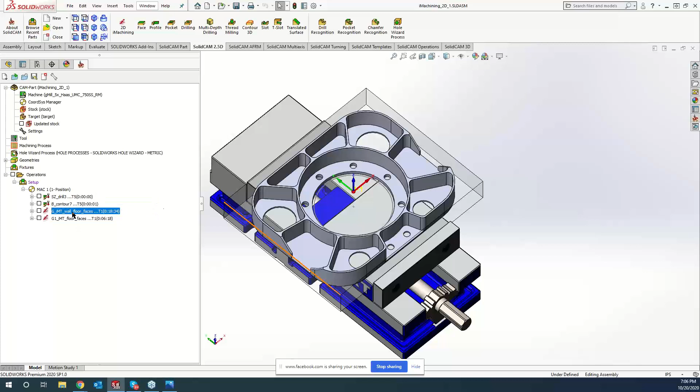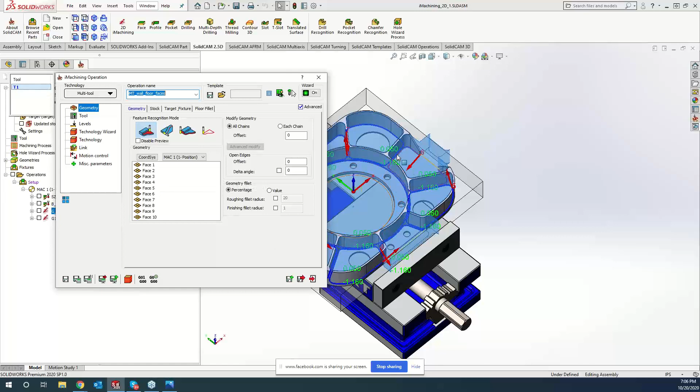Inside iMachining, and this is new for 2020, is all the different feature recognition that they have built in there. What we talked about a few weeks ago is all the feature recognition by face. So what we did here is just clicked on all the different faces, so you can see all my different faces that I selected here, as well as there's a light blue highlighted area of what iMachining is looking at to machine out in that area.

We have all the different modes in here, and today we're going to be talking about feature recognition by chain. But just to recap, this is all off of faces. All you guys have to do is click your mouse cursor in here and click on any face that you would like to machine. Doesn't matter if it's a fully open pocket, a semi-open pocket, or a pocket with an island. It will recognize all based off the updated stock that is in there, and it will only machine the rest material that is left over.

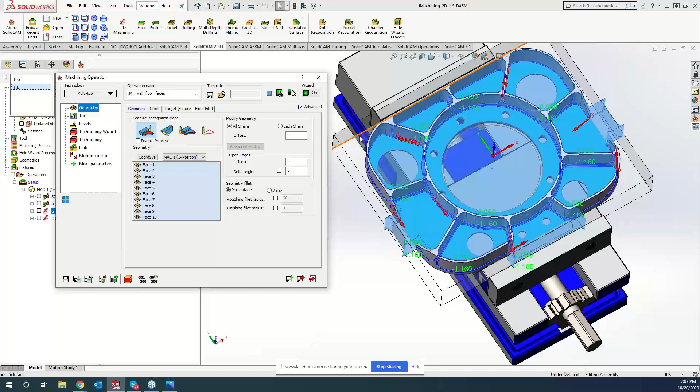As well as we did a probing on this right here. So what I'm going to do is quick run this through our machine simulation. Give it a second to load here.

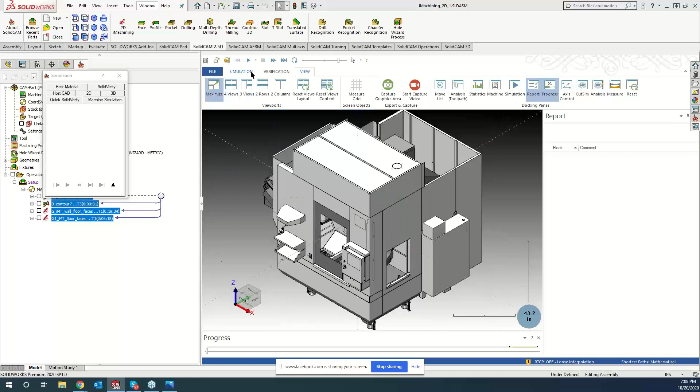All right, so I have the 3-screen preview showing right now, and once it gets fully loaded I'll switch over just to the single. Okay, so we have our single machine there, and we'll just get rid of the machine housing and zoom in here.

So the first part we're showing right here is the probing. Let's slow this down a little bit. So probing our x-axis, now we're probing our y-axis, and doing our z-hit. Now this is where it's getting into the iMachining based off of the faces here.

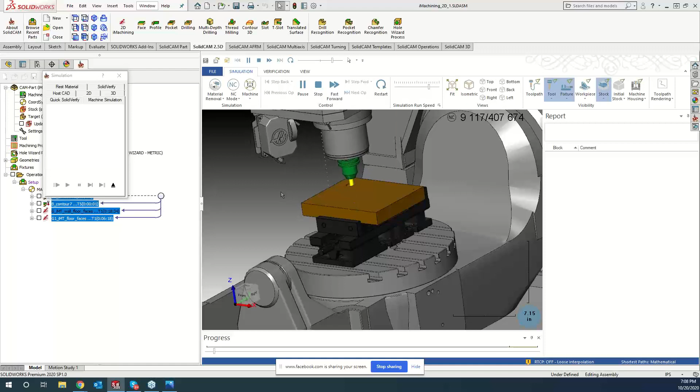So we can kind of speed this up here. I am showing machine sim right now just to give you guys a better look at maybe a different machine or what the machine sim can do for you guys. This machine is a Haas UMC 750 that we're currently running this on here.

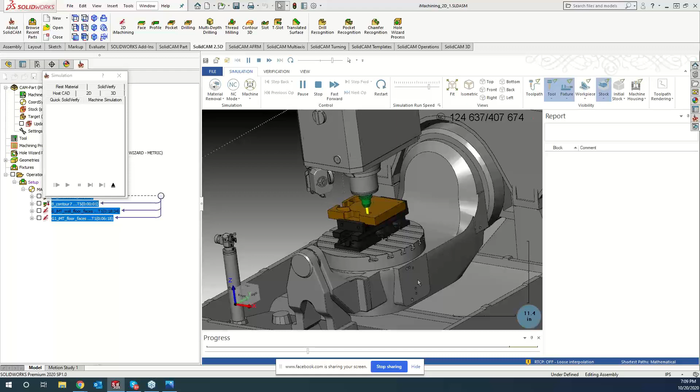Now I did learn something new about these UMC 750s, and maybe Greg knows this, but I sure didn't. On this Haas UMC 750, you have your full 5-axis right here that you can mount your vise, but you also have the option to mount a secondary vise over here on this flat side, and that's kind of where the bolt holes and the pin holes are set up for you guys. So if you're doing pre-prep work on this one and then doing the full machining on this one, you guys do have the option. Now on this one, you're not going to have the full 5-axis, it's just going to be 4-axis, but you do have that option there to run that vise, and I never knew about this.

Greg, did you know about that? Yeah, I think it's a newer feature on the machines once the UMC series got the redesign. Oh, okay, the updated one, gotcha.

You know, it's kind of weird that you guys are talking about that, because I was just talking with a customer of mine last week, and I didn't know that either, which was really cool. They were like, oh yeah, I can set up a second setup on that 4th rotation. So yeah, it's a pretty cool feature.

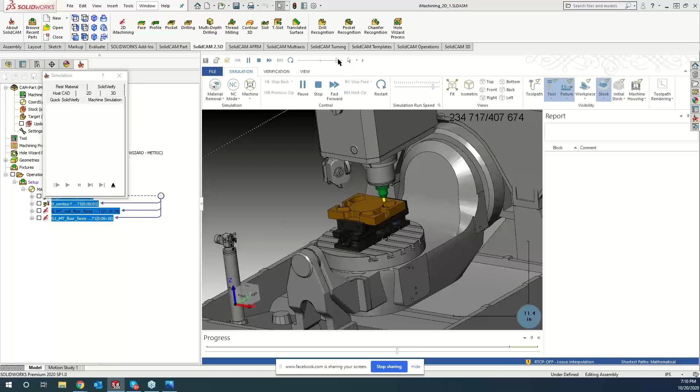Absolutely. All right, we'll speed this up a little bit here because don't want to put you guys to sleep quite yet. But you can kind of see we're basically machining out all these pocketed areas, all based off of just selecting those faces.

So now, instead of selecting a face, what we're going to be focusing on today is more or less think of it as a through pocket. We can do through slots. We can do single line geometry as well.

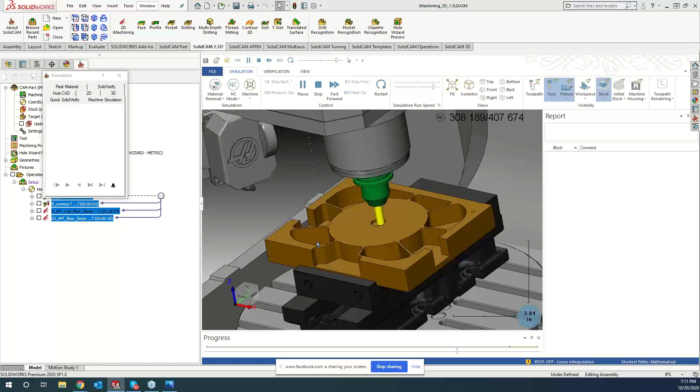So let's go ahead and move forward with the iMachining feature recognition based off of chains. Now what I'd like to do is, you can see when I clicked my faces, I was able to grab all these different faces to get these machined off. But I have these through pockets right here in the center, as well as these 4 outer holes that I would like to machine off, and they've set it up with the new iMachining to be able to do those features.

So from right here, we can just go ahead and click on our 2D iMachine. Okay, so by default, it is set up to do by faces.

Now, if this is something that you guys more or less do, maybe feature recognition by chains... The truth is out there. What's that? The truth is out there. Somebody's ringtone just went off and it sounded... Oh, it's mine. Sorry.

So you guys do have the option in your settings to set up the default. When you open up a new 2D iMachining operation, you can have it defaulted by faces, defaulted by chains, do outside feature recognition, or no feature recognition at all. So you do have that option, and I should probably show that to you, since a lot of you are using this iMachining quite a bit.

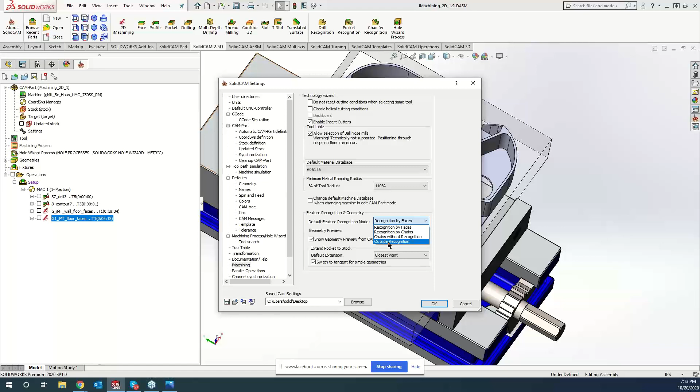So if you open up your global SolidCAM settings and go down to iMachining, right here is your default. Right now I have it set to default recognition by faces, which is probably on all of your systems currently, because that's the default install. But if you'd like to do recognition by chains, or without any recognition, or outside recognition, you do have that option right there. So anytime you start a new iMachining operation, it will be customized more to what you'd like instead of what our software is currently loaded with.

Okay, so we want to do those through pockets. So I'm going to grab new geometry, and I'm going to grab all these circles in here, or these through pockets.

Now, like I said, all of this feature recognition is based off of updated stock. So if we didn't have this face milling, or this recognition by face, already pre-milled out, it would know that there's remaining stock up here, and it would need to start from the top and work its way down. But since it's all based off of that stock recognition, it knows we already machined down to this face, so all we really have left over is this little area right here. As well, it doesn't matter with iMachining, you can pick different levels all the way through—it's all based off of the stock, so we're not going to machine any air at any point in time.

So now what I'm doing here... sorry, my text message. There we go. So for this first one, I'm going to pick a very large end mill. We've got a 1.25 inch end mill going in there, so we'll go ahead and accept that.

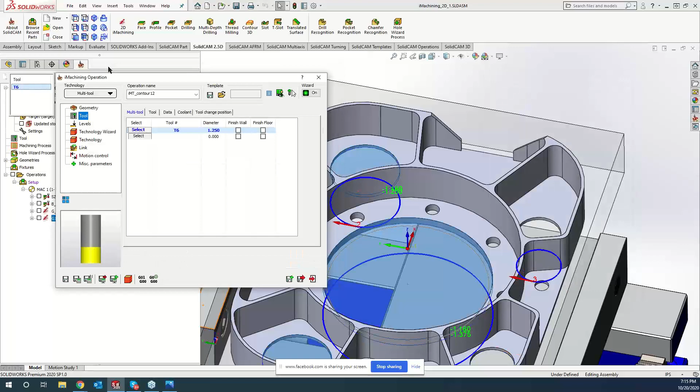Now you'll see that it's doing the updated stock, so basically anything that is blue is going to be machined by that tool. But obviously I have 2 holes left over here that I'd like to machine out as well. Previously with iMachining, what you'd have to do is a save and copy, then change it over to a smaller tool, and it would find it. Well, now we can do all that within one operation.

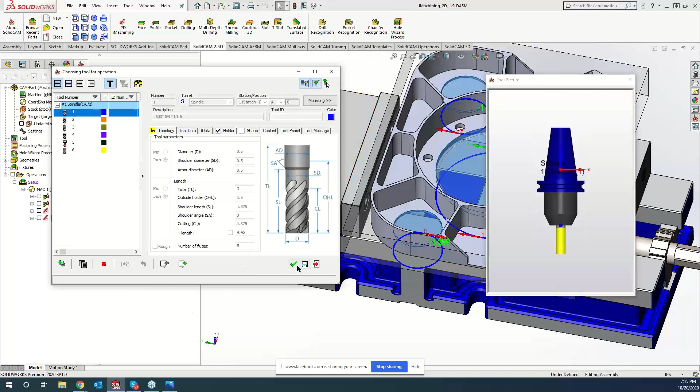So for our 1.25 inch, I'm going to tell it that I'd like to finish the wall. Then I want to come and add a secondary tool, and we'll grab our half-inch end mill, and as well I'd like for it to finish the wall.

Now our levels are all based off of the updated stock, so it's going to default to the variable levels. If you want to go more in depth, maybe put a delta in there, we can click on variable levels, and it's telling me my chain 1, which is this one right here, is going to go down 1.375 in depth. But we want to go just a little bit farther past, so we can do maybe a negative 20 thou past. As well, on chain 2, we can do a minus 20 thou.

Okay, so now I've told it that it's going to find those levels automatically for us. But if I want to go that little bit farther past, we don't get that sharp line or that little flappy piece, that little flange down here at the bottom. That's the way to go about it.

Now Technology Wizard is the same as what you guys have been used to seeing before, it's all based off of the iMachining Wizard, and it's based off of our tool that we're using as well as the material. If we'd like to go a little bit faster or a little bit slower, we can move this up or down. Now since I'm using two different tools, you'll see that I have a dialog pop up over here.

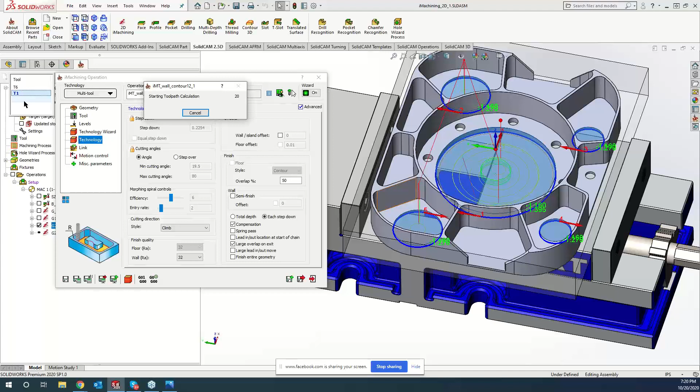So Kevin, as this is calculating, is it worth maybe spending just 30 seconds on talking about tool holding, work holding, things like that? Because it makes a big difference when you're talking about surface finish, that's hugely important. Absolutely, yeah, that's a great point.

So if you guys are planning on running iMachining in an ER holder, ER32, ER16, let's just say that's the worst case scenario. Best case scenario is if you guys are running a tool holder and a heat shrink holder, as well as here at SolidCAM we use what's called the Rego-Fix holders that are done by hydraulic pressure that work absolutely phenomenal. Both myself, Brendan, Greg have all watched those in action, and it just blows our mind on how well those tool holders work. But it is also with the tooling as well, so the old saying, you get what you pay for.

If you guys try to go out and get that cheap tool, you may not get as good of a surface finish, as well as a good tool life, than if you go out and spend a little bit more money and get a nicer tool, as well as a tool holder. For those guys that are just trying to scrape by, you can run those ER holders, but I'd recommend dialing your machining level down to about a 3 or 4, just because with those ER collets you will get some run out and some flex.

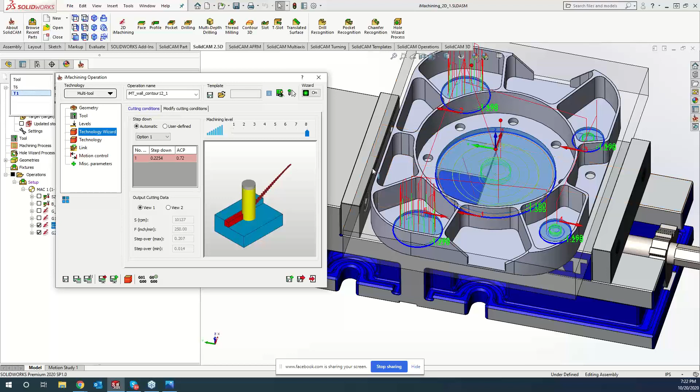If we're trying to run this on a vacuum table, we're going to want to dial this back a little bit, versus if we're running this on our Kurt vise here, we're going to get good work holding, and you can see that I'm clamping onto a good meat of this part right here.

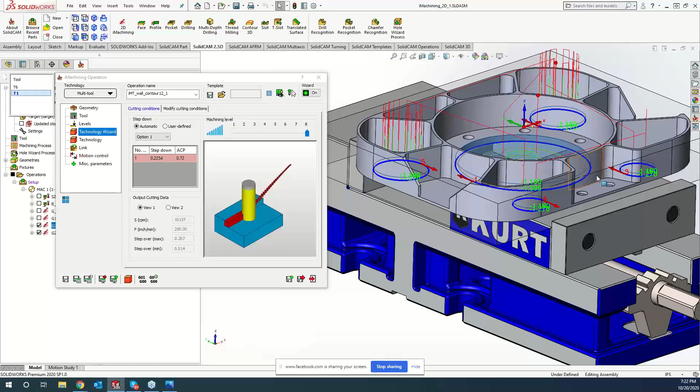So that's a great point, Brendan. Basically, to sum it up, the more you spend on your tooling and tool holders, the faster you'll be able to push iMachining, as well as get that production out the door for everyone.

And just to add to that super quick, Evan, this is what makes iMachining what it is. It's because when you have those great conditions - the tool holder, the tool itself, the fixturing, all of that stuff - that's when you really get that focused material removal that iMachining can really do.

Every time I look at that little icon, or that graphic of the window where the tool is, I'm sure so many people look at that and go, well, I can push that a lot faster, can I? Well, yeah, you sure can if you have the right conditions. So that's something you really need to take into consideration.

That's definitely a great point. So one thing I did not cover a few weeks ago is the basic fundamentals of iMachining. We have a machining level 1 through 8 here.

And this is basically how aggressive you want to be in the cut. I like to tell people this is the pucker factor - how much do you want to pucker up that first time.

But let's say that, all right, I'm running level 8, but I know my machine and my tooling can go faster. Well, that's what we have the modified cutting conditions for. So we don't lock you guys out of anything at any point in time.

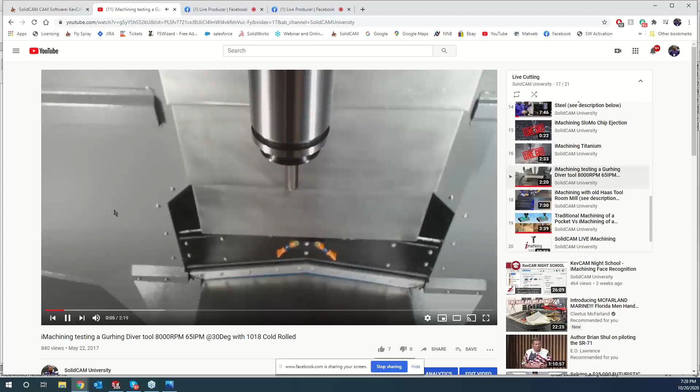This is nuts. We're basically trying to break the end mill, and it didn't happen, but I went a little too far here. I remember this one, Kevin, because we kept telling Ken, just go faster, go faster. Yep, let's add more angle. So this is 1018 cold rolled right here using a Gurhing Diver, and look at that. That's crazy, with a 30-degree helix.

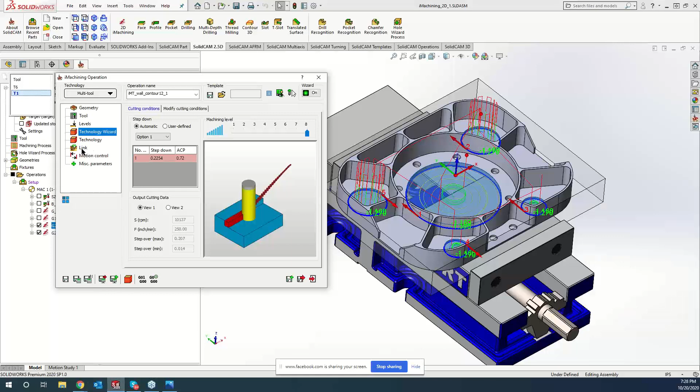We started off, so by default, I'll pause right here. By default, our linking in the link section is 1.5 degrees, which is really safe and conservative. But Gurhing sent us these tools and said try it out, let's see what can happen. So we started playing with 5 degrees, then 8, then 10, and I think Brendan finally said, Ken, let's just crank it up to 30 and see what it can do. Between the built-in algorithm and the tooling, this was done with a REGO-FIX tool holder. We knew our tooling was very good, so we cranked it up and hoped for the best.

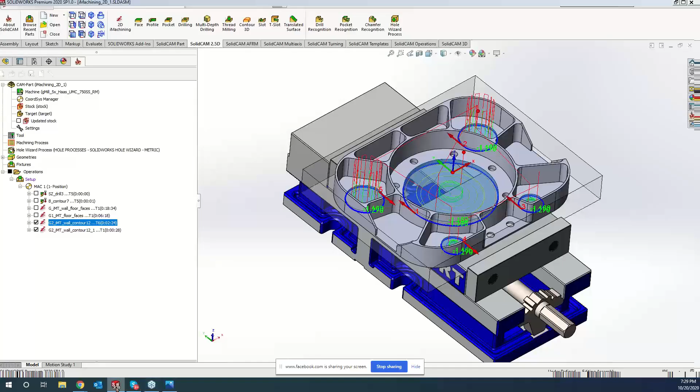So definitely the sky's the limit when it comes to iMachining. It doesn't matter if you're doing a one-off part or running massive production, iMachining will be there to back you up either way. Awesome, thanks for showing that, Kevin. I appreciate it, didn't mean to derail you there. It gives me goosebumps every time I look at it. I love it.

So we have our through pockets all selected here, let's take a peek and see what we're doing. I know there was a lot of talking, more explanation than anything, with the through pocket, but it's as simple as grabbing that chain, picking your tool, deciding how aggressive you want to be in that cut, then save and calculate.

Now, one thing that comes up on the support side is, if I make a change to the iMachining operation up here, why am I getting the asterisk to recalculate again? That's solely based on the updated stock. So if I make a modification, and we'll do one so you guys can see how it works, to a previous iMachining operation that affects my updated stock, then the operations following that will need to be updated as well.

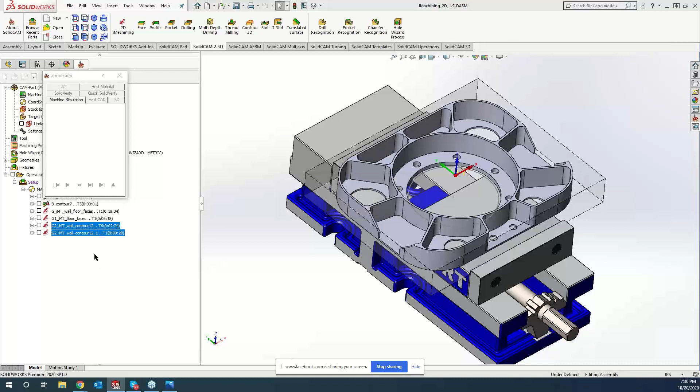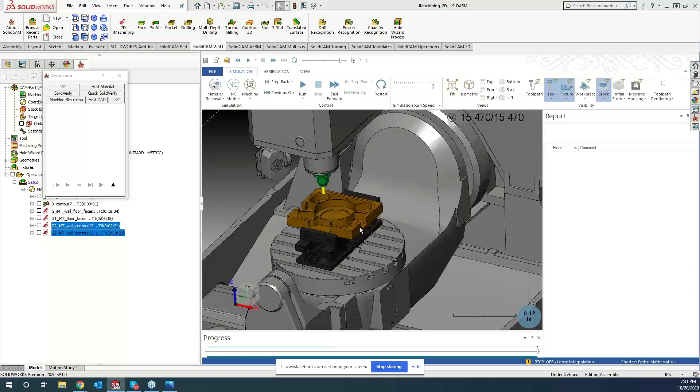All right, so now we'll get zoomed in for everyone. So you can see we're doing that helical entry. I did have more than 20 thou stock on there, so you can see we haven't broke through yet, but at least when we go to the second op side to fly cut off that backside, we'll have that taken out of there. So very simple, very easy to use.

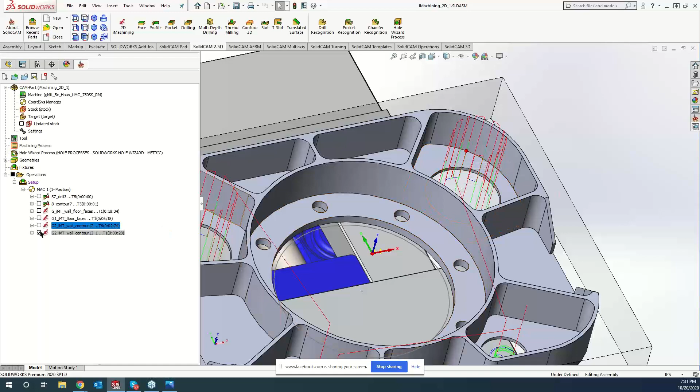Now, how about here? Like I said, what I want to do is show you guys on this particular one here. So let's say that I changed up my iMachining from the faces. I'm going to turn that checkbox off. It's that one right there. I'm going to come in here.

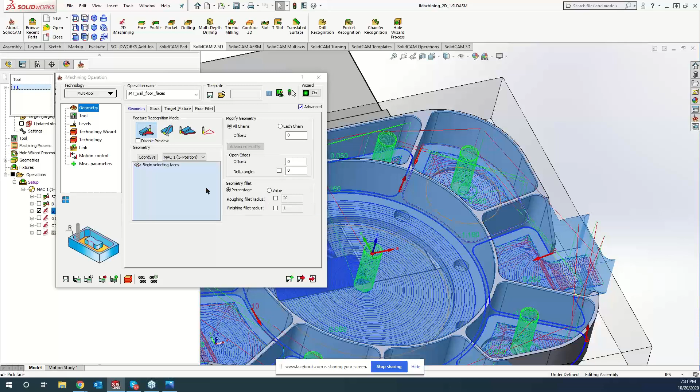And we'll go to our geometry. And I'm going to deselect that one face. Actually, hang on, I'll select everything. Just a couple of these here so we're not wasting time for you guys. And we'll do a save and calculate here.

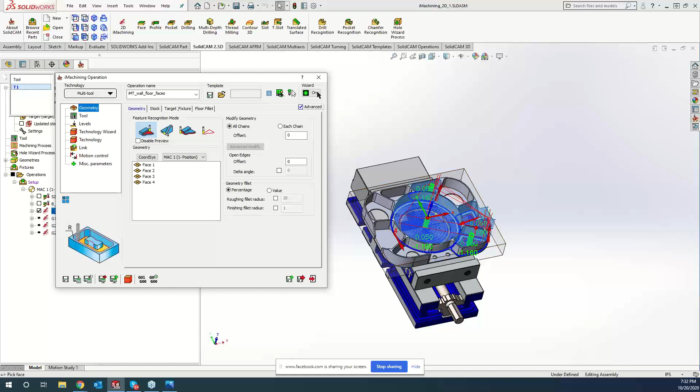And more or less, I just want to show you the updated stock that's going on behind the scenes. So now that I'm not doing that through-pocket with that face over here, you'll see that all my operations below have a little asterisk by them saying that they need to be resynchronized. That's solely based off of the updated stock. So we'll go ahead in here and calculate these.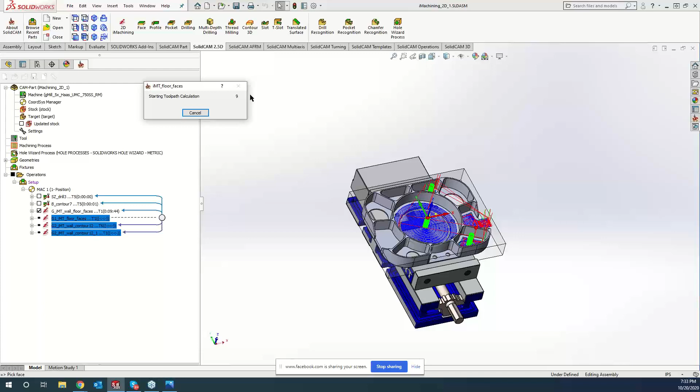And with these live cuts, while this is calculating, for those of you watching on Facebook, there is a Facebook group called SolidCAM North America. Matt has become a really good friend of ours, and we're going to be doing some live cuts on his UMC 750 coming up in the future. For those of you keeping involved with the Titans of CNC, they have an aerospace division that we're going to be doing a bunch of 5-axis cuts on as well. So keep tuned to that in the future.

So now, go ahead and play this through here. We're updating everything. You can see right here.

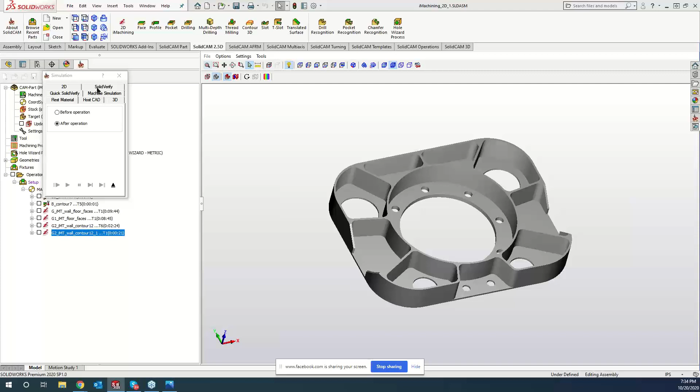Important to note here too, Kevin, is that everything, the stock itself, the simulation itself, is all being updated live, correct? Yep. So you're going to see this live toolpath, right? Yep, absolutely.

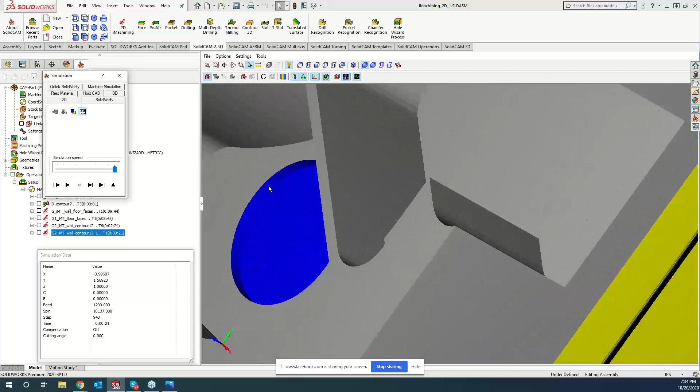So now you can see we have our through pockets going all the way through, and I can kind of zoom in here. It's tough to see because we still have some excess material on there, but it's all based off of that updated stock. Before, it was starting down in the hole and working its way through the stock, where now it's starting at the top and working its way down. So like I said, it's all based off of that updated stock.

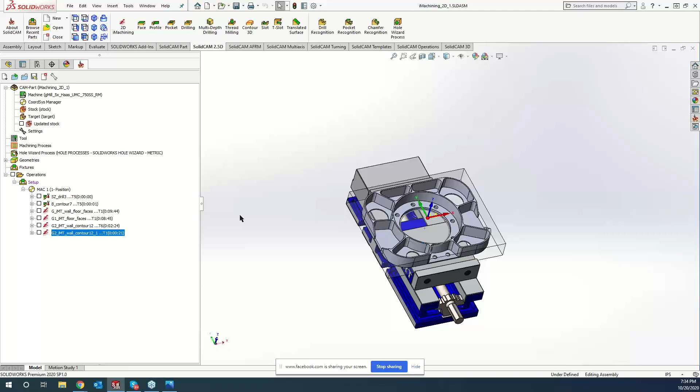And we'll get into part 4 of the iMachining operations where there is no feature recognition, which is basically old-school iMachining, but there's no feature recognition built into that. So we'll be covering that in part 4 of iMachining. Don't give away too many secrets right now, Kevin. Yeah, can't let the cat out of the bag too early, right?

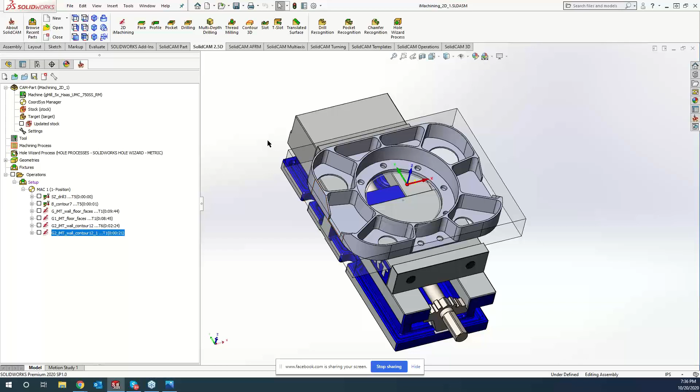So that is going to be coming soon as well for everyone too. And that's, again, Kevin, if I can just interject one more time, I know you're getting sick of this, but what's really cool is Kevin just brought up a great point.

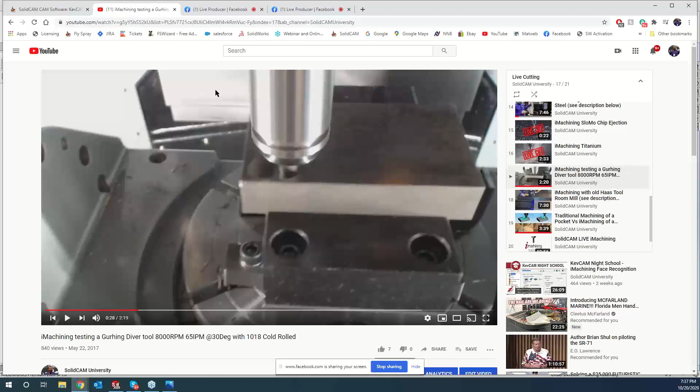Anybody can show you a graphic or a simulation of how great this looks. But we take a lot of pride in the fact that after we program this, we can actually put it on a machine. That Gurhing video, diving into that material, these are all realistic toolpaths. These are things you can be doing with your machines, and you don't have to have a brand new or high-speed machine to do this at all. We've done countless studies with machines that are 20, 30, 40 years old with massive backlash, machines that should probably be boat anchors, and we're able to take these and make them production machines again. It's really all due to that iMachining algorithm.

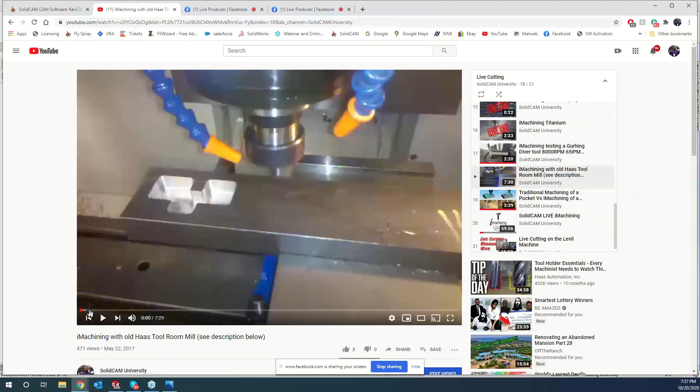So, again, I know Kevin's trying to interject there. Yep, I knew it, this old girl, rode hard. Kevin's going to be like, I wonder when Kevin's actually going to say, 'Can Brendan just stop talking?' No, no, I'm not sure if I can. This is a great point.

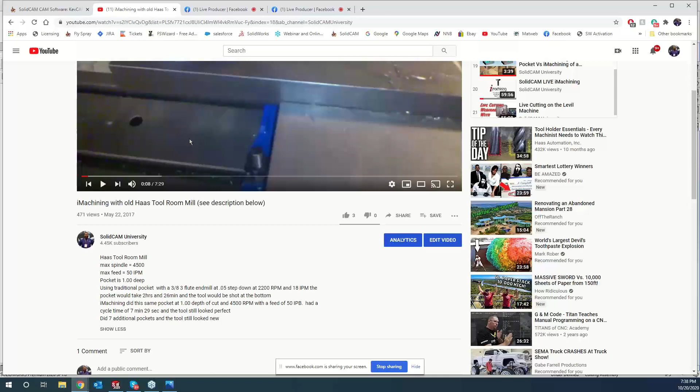Like Brendan was saying, iMachining is not just set up for the new high-tech machines out there. This is a 1996 TM1, a tool room mill, the cheapest Haas mill you could buy. Runs off 120 volt, not even 240 or 220, and it's been rode hard, put away wet. It's a very non-impressive video until you read what was going on here. Traditionally it was taking 2 hours and 26 minutes to cut these pockets. Ken came on site and did it in around 7 minutes. Not only was he able to make one pocket out of that tool, he made 7+ pockets out of that tool, where before the customer was only able to get 1 end mill per part.

So to go off exactly what Brendan was saying there, it has nothing to do with your machine at all. You can have that old rickety one in the back corner that we will make come alive, as well as the brand new machines out there. Definitely a great point there, Brendan.

Yeah, and these are documented studies that we've done with these machines. So the other thing we'd invite you to do is feel free to challenge us. Send us a part that you might find challenging, and we would be more than happy to put a toolpath on it, and hopefully we can do it faster. I'm pretty confident that we can. 9 times out of 10 we can, and that's the thing, we're not afraid of the challenge. Give us your most complex part, and we can program it with ease. Confidence level is just over the top.

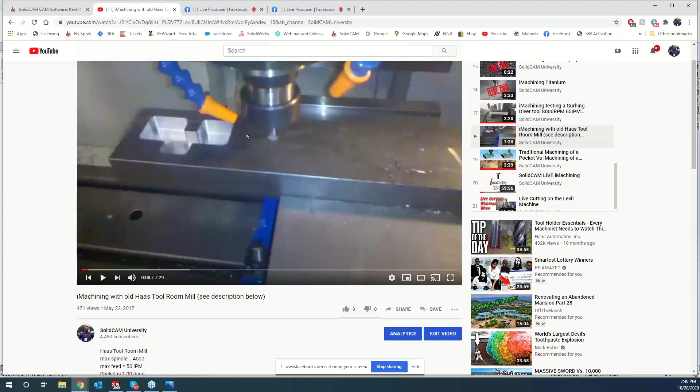Yep, and that's why we have the live cuts in here, because we want to prove it to you guys. To make it even better for the night class, we're going to be doing these live cuts along with the toolpath of each one. So going forward, half the night class will show you how to program it, and then we're going to actually prove it to you, so we want that confidence when we show it to you guys.

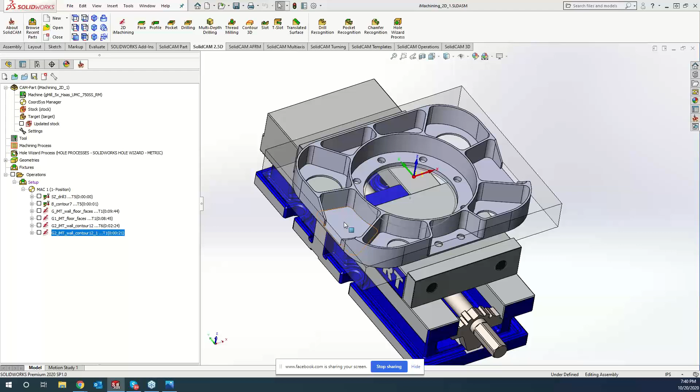But with that being said, that basically covers everything through the chain recognition of iMachining. Greg, do you have anything I'm missing out on here? No, it's pretty comprehensive. The only thing I'd like to see is, everything you've done so far tonight was with a closed chain. How the feature recognition works with open chains. As like an open face or a semi-open chain, kind of like right here? Yeah, as a semi-open chain. Okay, well, let's do it.

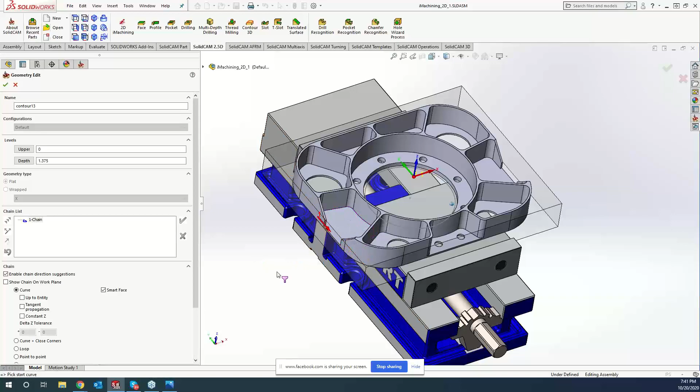So we'll go ahead and do our 2D iMachining. Since we have the smart face technology, all I really have to do is click on the face and it's going to automatically throw that chain in there for us. You can see here that we have a closed boundary. When the geometry knows it's an open face, it automatically marks that chain as open for us. So we'll go ahead and grab that.

Yeah, actually Kevin, I was talking more about a chain that wasn't closed, not an open wall, but like a singular piece of geometry instead of a full loop. Okay, so you're saying delete this.

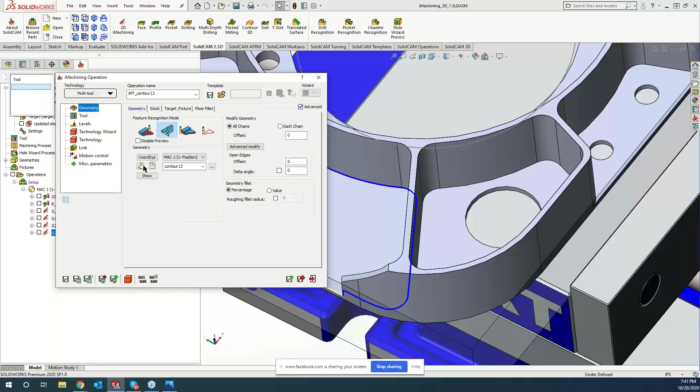Yeah, like maybe that angled face there would lend itself very well on an indexed move. Angled, where your directionality arrow is. Okay, so you need to cut that. It almost looks like a very large chamfer.

Oh, if you were here, rotate that part up 90 degrees. Here, I'm a little confused. Let me do this. I'm going to give Greg keyboard and mouse here because I'm going to say Greg Payton is throwing down the challenge. Yeah, I'm not sure what you're looking at here.

If you wanted to trim off that face, so if you were to index the table to where the tool was normal to, come and highlight this surface here, and you just wanted to run down this side with the end mill using iMachining. Oh okay, so for that, let's go ahead and add a new position in here.

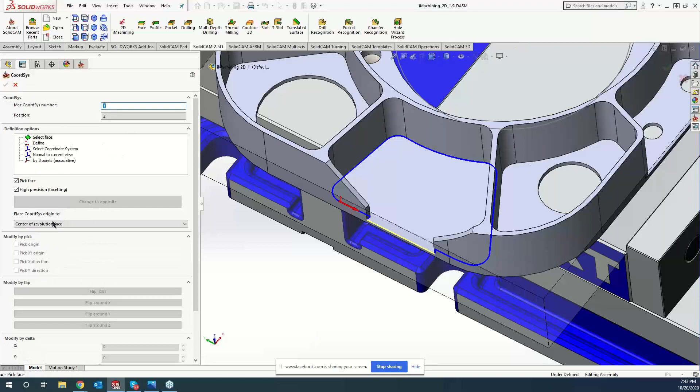So we're talking about rotating up this way. We'll be sitting on our machine like that. We'll do a flip around Z. Go ahead and accept that.

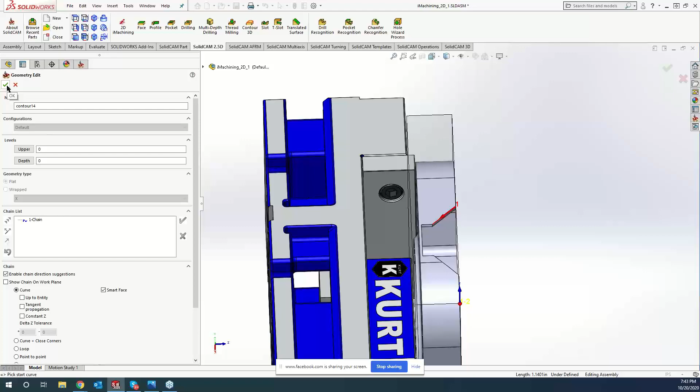So now we'll do our single line geometry, which is, I think, what Greg is getting at here. And now, when I grab this chain, I grabbed it on the top, which is going to leave my depth at 0. So if you guys want, at that point, you can come right here and tell it the depth that you would like to put in there, or we can grab that bottom half of the chain and put that in there as well.

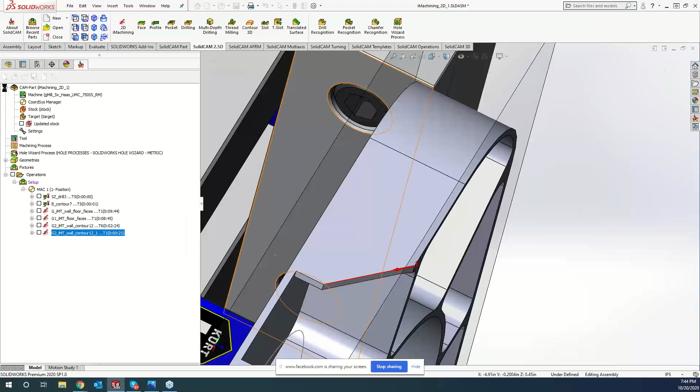Or another area that we can put that in there is our levels, and we can tell it just to go right there. It will grab that, and we can tell it to go in maybe just like 20 thou past.

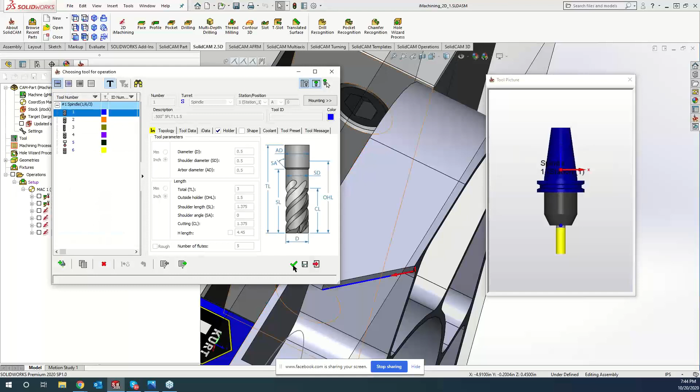And we'll go ahead and grab our 1/2 inch end mill, and we'll tell it we would like to finish the wall. Save and calculate.

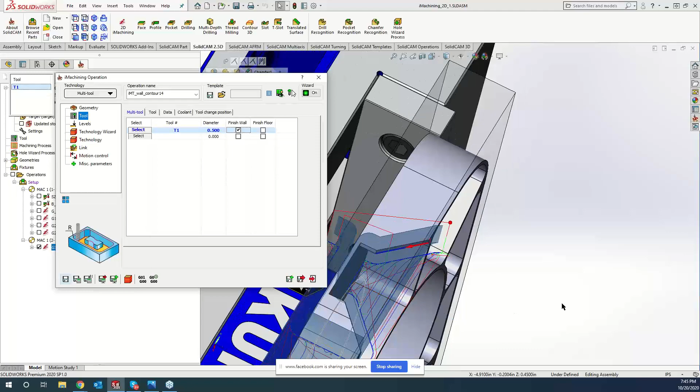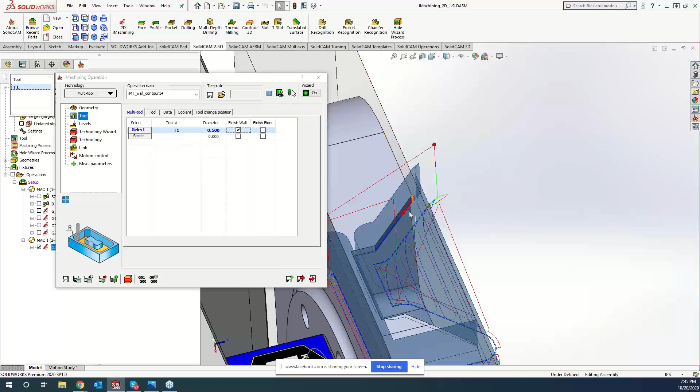Now, it doesn't look like you finished out that pocket from previous operations. So since I did not finish that out from a previous operation, it is seeing that anything that's off of this plane right here is going to be machined off. So what I can do is go back and tell it to finish that, but this kind of shows some good light on how well the feature recognition is working, because it is seeing that we did not finish that pocket right there, as well as the outside of our material. So it's going to come in here and machine everything that it can, based off of that index point, or that coordinate system that we're working on. So it sees that there's excess material there.

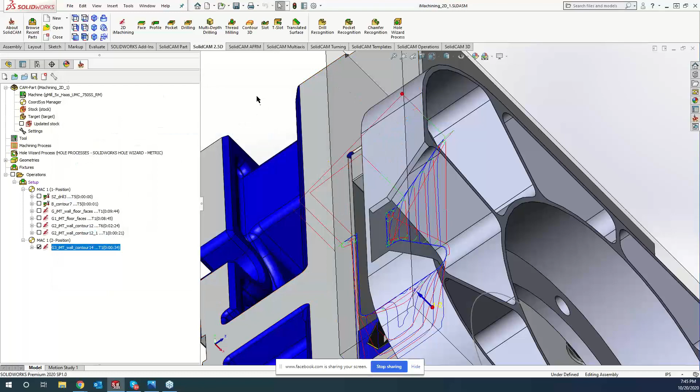Maybe this will be a good opportunity to cut that pocket on the first index orientation, and we can see the update based off of the rest of material change. So let's go ahead and open up that face, and we'll go to geometry. Save and calculate.

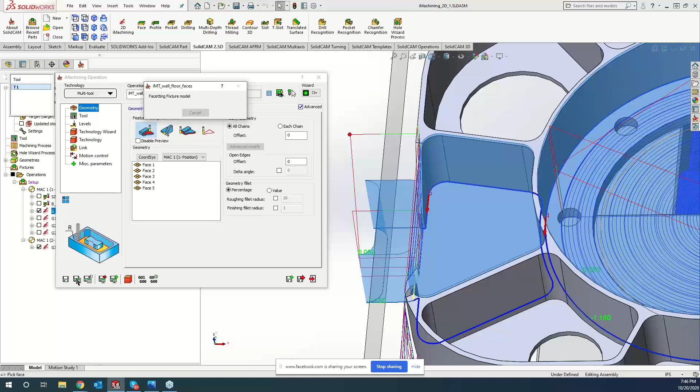Now we can see that we're coming in from this front side here and getting all that material out of there. So we'll go through and calculate these. And as previously advertised, we are getting those asterisks next to the operations, letting the user know that the material condition has changed and that those tool paths will need to be updated.

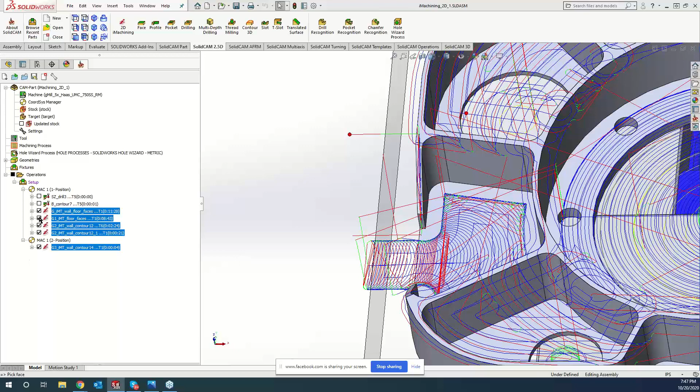Making the old computer think a little bit here. I was going to say, you got one of those old school ones. Is that what it is? Yeah, surprisingly, guys, this computing power right now, I'm running an old 7510, which is 5 years old now. And as we know, computers definitely slow down in their age. So okay, now let's go ahead and simulate this.

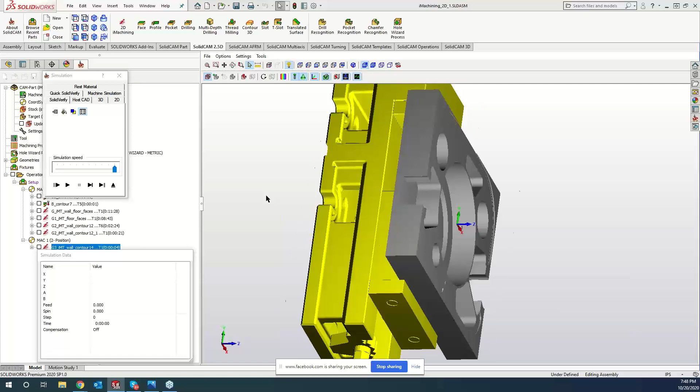But yeah, these types of feature recognition toolpaths can be great, especially when you have one of these multi-axis machines, like this 5-axis mill here, where iMachining is going to recognize exactly what material is remaining and only put toolpath where it's needed. Absolutely, we're not going to be cutting any air.

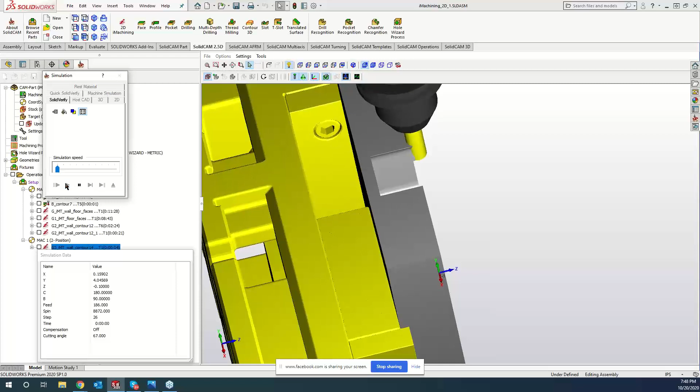So now that we've updated that, we have that pocket machined out in there, and now we're sitting up on end. It knows that there's just a little bit of material left over in that corner. Let me slow this down here so I don't have to click so many times. It's only going to eat away what material is left over.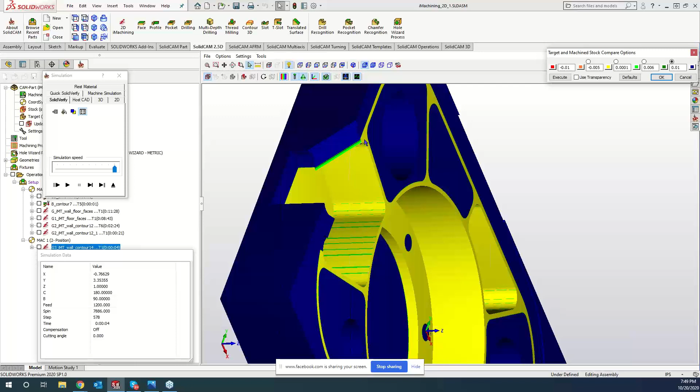So now we can see that we've come down this angled line, even though we still have remaining stock on the outside of our part, and you can see we're right on green right here. That could be because I didn't set up a finish on there, sorry about that. We'll go to our tool - oh, we do have finish on. Okay, it could just be my accuracy of my solid verify here is turned down.

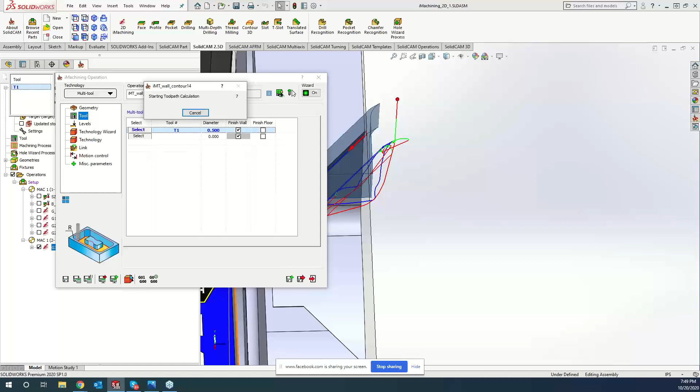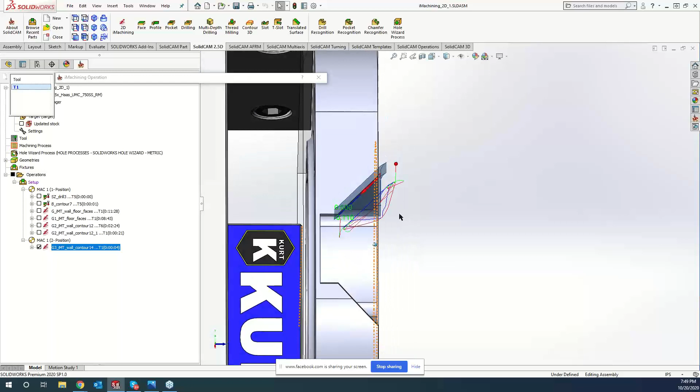So you can see right here, minimize this, that this highlighted blue area is the only thing left over from that remaining stock. And even though we're machining it on Mac 1 position 2 right here, and it's flipping over to a completely different coordinate system up on its side, it knows that stock is still there and it's going to come machine it out.

So very intelligent technology there, and that's, like I said before, solely based off of the updated stock. Great point - yeah, it's keeping our optimum tool engagement angle making that cut.

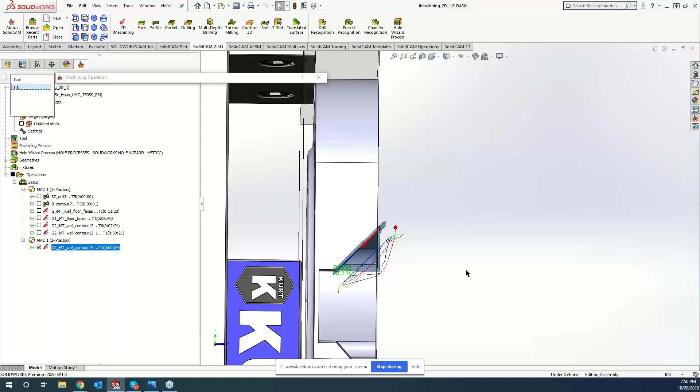So the other options we'd have for making this kind of toolpath would be something like a clear offset when you're doing a profile, but we'd have to guess at that. What that'll do is you're essentially either manually calculating out that tool engagement angle, or you're getting a very light cut in the beginning and then stepping it in constant values. But there's a lot of air cuts because it's basically just a translated toolpath, whereas this one is only cutting where it sees the remaining stock is going to be.

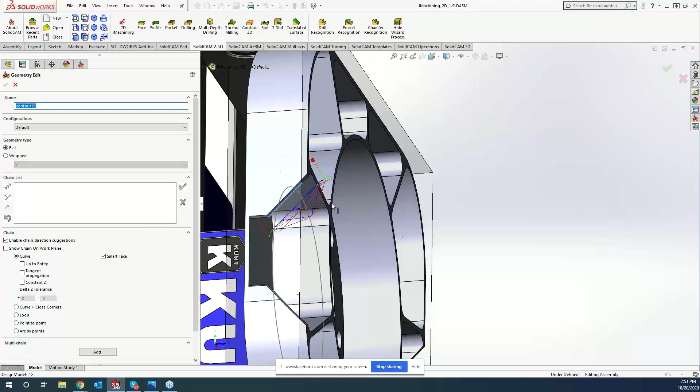Yeah, let's do it as a good representation here. We'll go ahead and do a profile operation and show you guys the different air cuts that would happen along that process. So come in here - I'd like to change that. We'll go ahead and grab that same tool there. Levels are good, and we are going to be doing a clear offset.

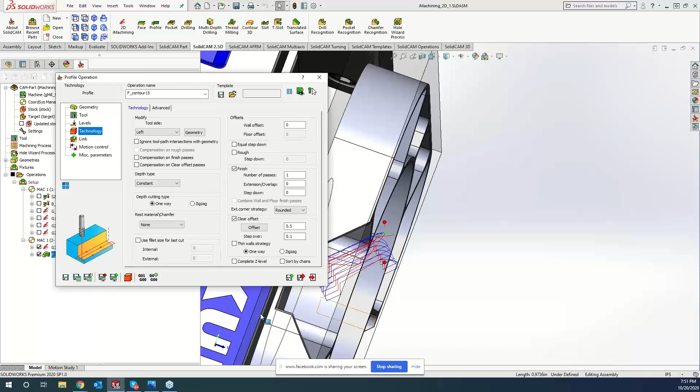Now, like Greg was saying, we're going to have to kind of be guessing at this. So I'm just going to start off at maybe a 1/2 inch, and I would like to step over every 100 thou. Save and calculate. And now we can kind of see, well, obviously I didn't need to go out a 1/2 inch, so maybe 300 thou.

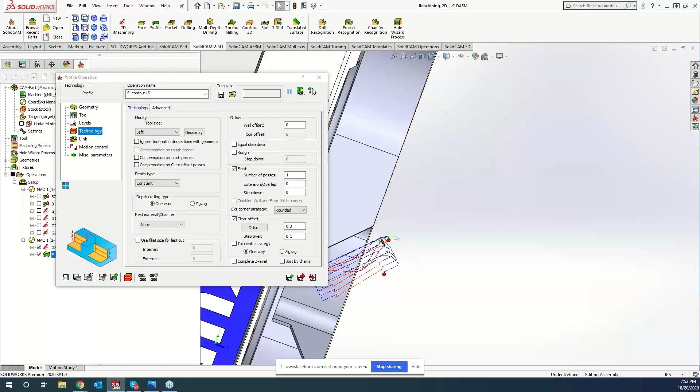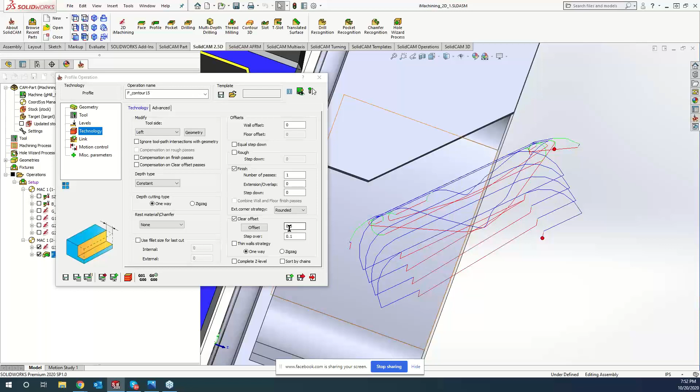And to get a better view there - definitely much easier for you guys, because my favorite thing is I don't have to figure out a feeding speed and how much to take per pass, plus guessing on how much material is left over. So definitely it's a great feature to use. Hopefully everyone is taking advantage of that.

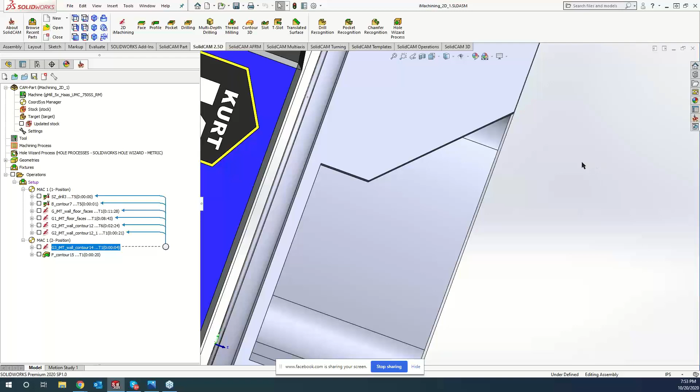All right, Brendan or Greg, anything else that I'm missing out on here before we end it off? No, I sent the question out as well. If there's anything anybody wants to see, we do have a couple minutes. Should we leave it open for a minute or two here?

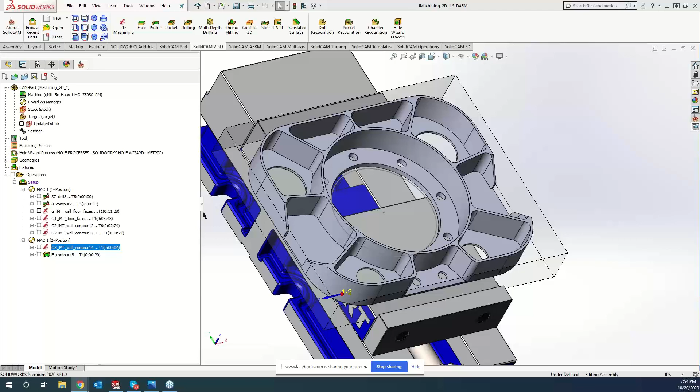Oh, he's got to get all fancy. Yeah, Notepad is so fancy, you know.